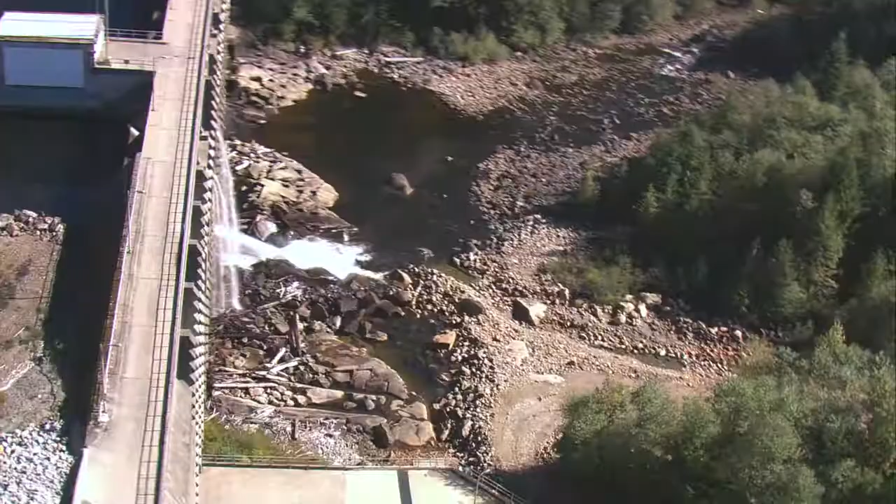Both the Seymour and Capilano reservoirs regulate the water level behind the dam using spillways. Currently, this water is simply returned to the river system, but it also represents untapped potential. As part of the region's joint water use plan, Metro is now considering using that water to generate electricity.

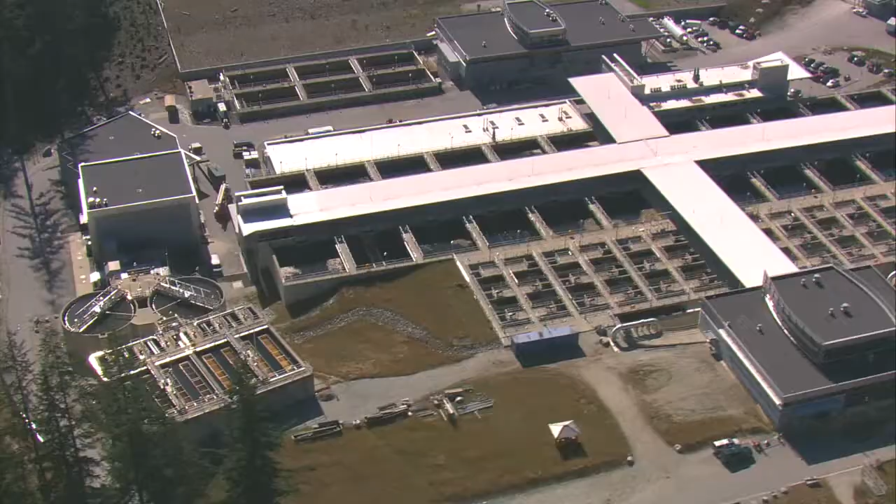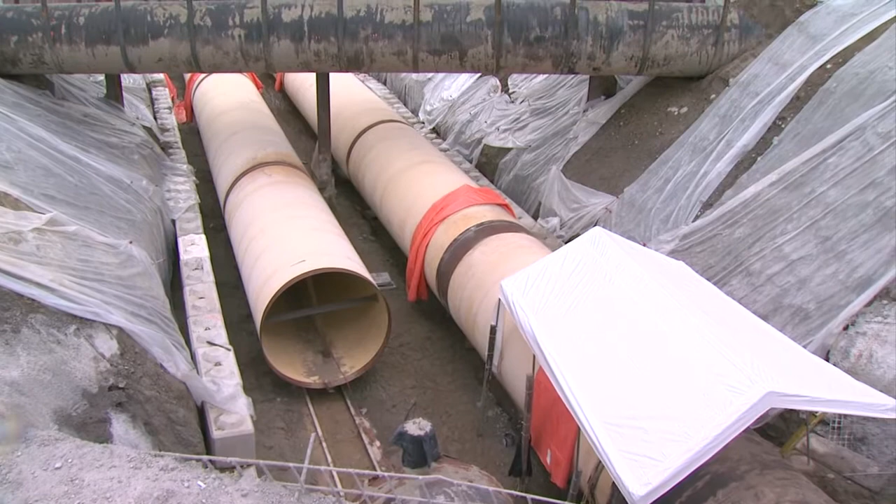The proposal is feasible because the new Seymour Capilano water filtration plant connects the Seymour and Capilano watersheds. So the tunnels linking these two tap water systems now create some opportunities for us, some flexibility to actually consider what we can do with these two systems jointly.

If you'd like to raise your hand, the microphone runners will come to you. First of all, however, the public is having a chance to offer their feedback about the proposal.

What population growth can you sustain with the system that you have in plan? The current reservoir system will probably provide an adequate supply for another 30 or 40 years.

The first public consultation session for the plan drew a variety of Metro Vancouver residents, there to discuss a wide range of water use issues. The reason why I came tonight is because it's very important that water remain in the public domain.

Of concern to many participants is the proposal's impact on fish in the river. We have a vested interest in what is going to be happening over the next 2 years with the water use planning issue, and we want to ensure that fisheries issues and habitat issues are going to be addressed during the process.

Like any water use plan, it's always a trade-off analysis. Water for fish, water for people, water at different times of the year. So it's that trade-off analysis where groups have to get together and find out what is the optimal solution.

You heard some concerns about not wanting to damage the quality of our water supply. That's number one on our list. We want to hear those concerns. We share those concerns, but we want to hear them coming from the public so that we know how to address them and how to allay those concerns.

If you would like to find out more, please visit the Metro Vancouver website. There you can find background information and additional public feedback resources regarding the joint water use planning process.

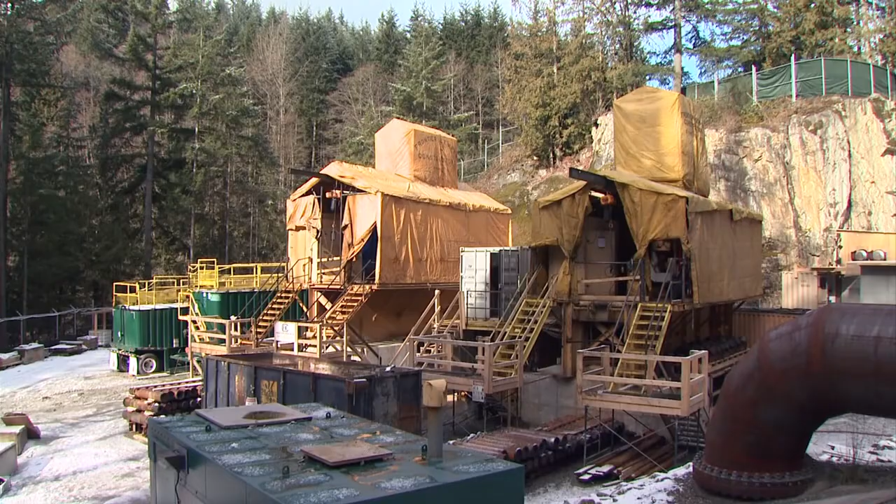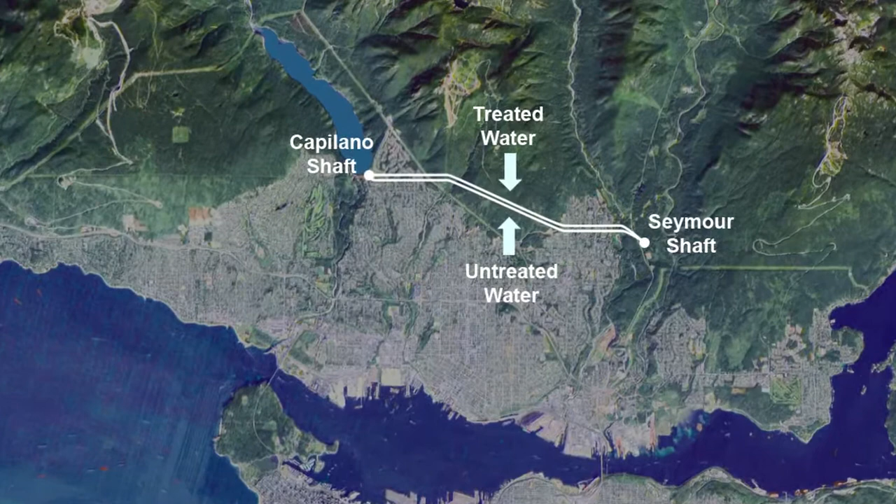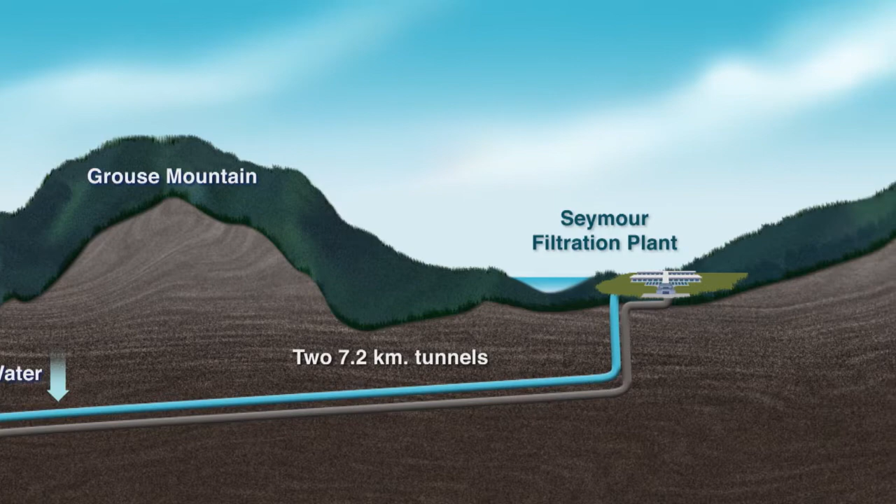The new kid on the block is literally on the block - the western end of it, that is. Twin 7.2-kilometer-long tunnels have been cut through the North Shore Mountains, from the Seymour watershed to the Capilano Reservoir. Upright shafts connect the tunnels to the surface. One of the underground tunnels will convey raw or untreated water from the Capilano source to the water filtration plant in the Seymour area. A second parallel tunnel will convey treated water back to the Capilano area, where it will be delivered to communities in the western part of the region.

Engineer Goran Ajaka has been with the project for close to a decade. What we have behind us, we have 2 raise bore machines doing the shafts for the Capilano end. We have 2 shafts - one is for untreated water and one is for treated water.

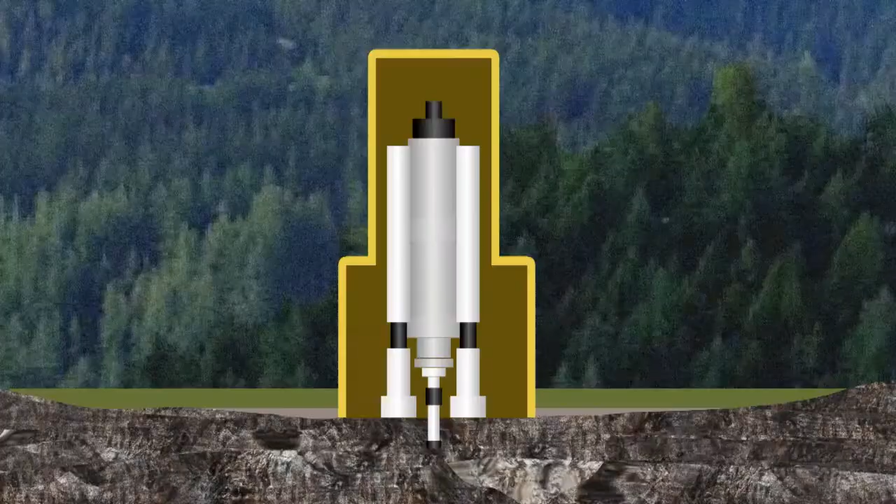A raise bore system is used. A powerful drill creates a narrow pilot hole that meets the tunnel below. A 4-meter cutter head is attached to the drill. The raise bore then begins pulling upward, with the cut rock falling down to the tunnel.

We're at the Capilano site, where we've been raise drilling these shafts to connect to the tunnels. Started raise drilling actually the week after Christmas.

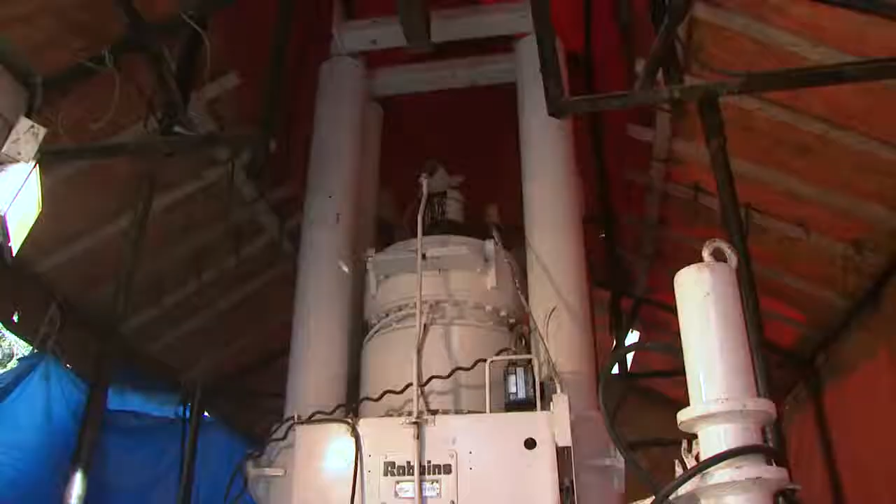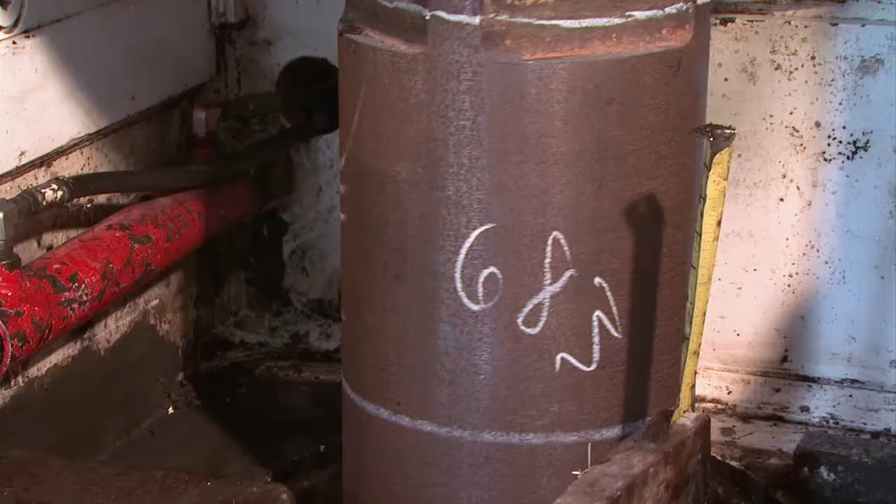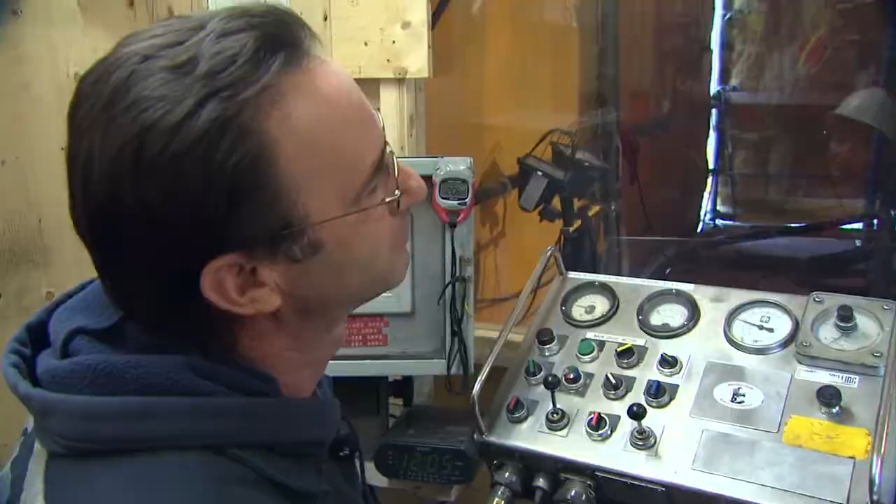Amid rumbles and screeches in the cabin housing the boring machine, the operators oversee the boring 24/7. That's a 200 horsepower motor, and it's going through a good sized gear reduction, of course. And it takes a heap to make that thing turn, and you can't see it. You know, I can't see nothing. And all you gotta do is go off your gauges.

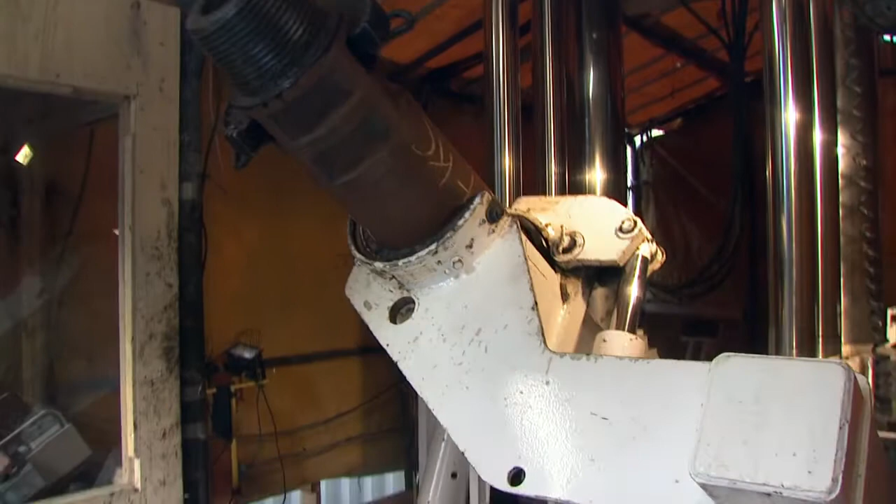As the machine is raising the shaft up 2 to 3 times a day, the machine needs to stop, pause, and remove the section of the shaft to carry on the excavation. I'm a driller's helper, and I pull the steel off as the raise bore, the reamer, is pulled up. The steel's behind me - there's 180 of them in there, and we just pull them off. I love it, it's great. It's working outdoors, which I like, and we get to do it at our own pace - well, actually the pace of the rock and the drill.

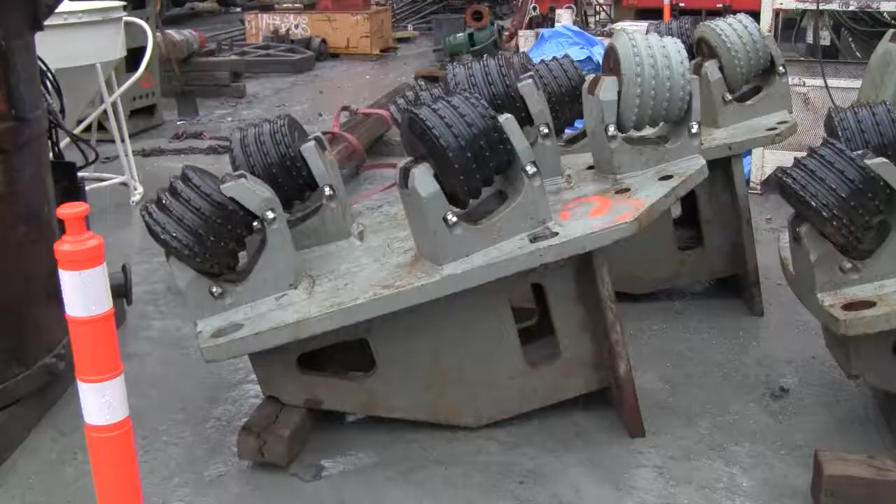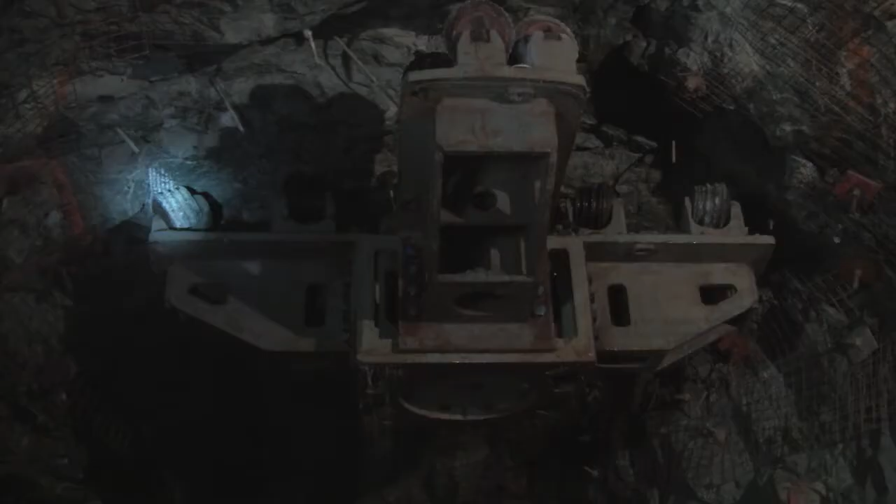The last time crews set eyes on the cutter head was almost 3 months earlier and 270 meters below ground. There are a number of cutters on the cutter head that are crunching the rock, chipping the rock. But I'm going to guess we were probably drilling a foot and a half an hour in that neighborhood, but it was granite all the way.

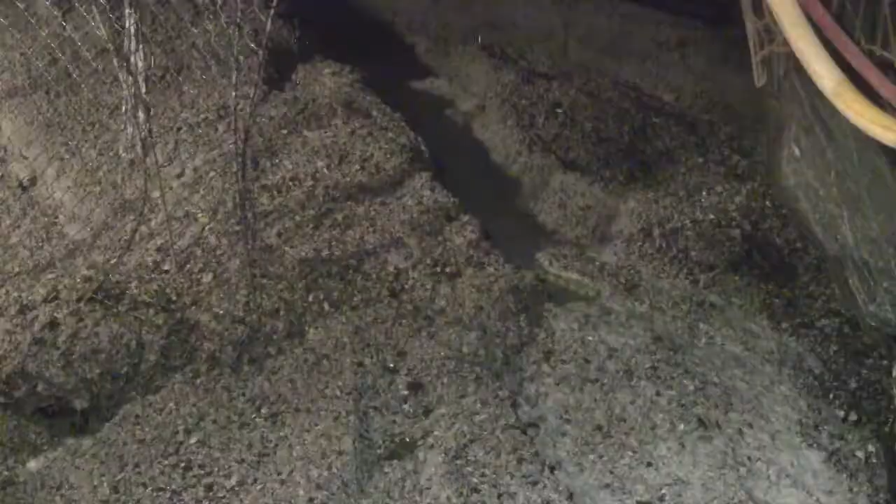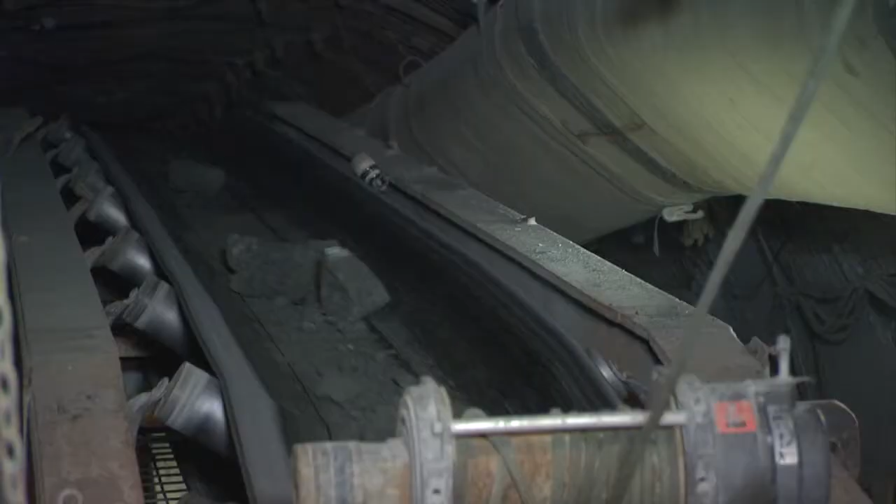Down below, the stones fall into a gallery at the tunnel end. They call it muck. There is equipment down there that scoops the excavated muck and loads it up into cars that are pulled by locomotives to the Seymour side. The material is being deposited in the Lower Seymour Conservation Reserve.

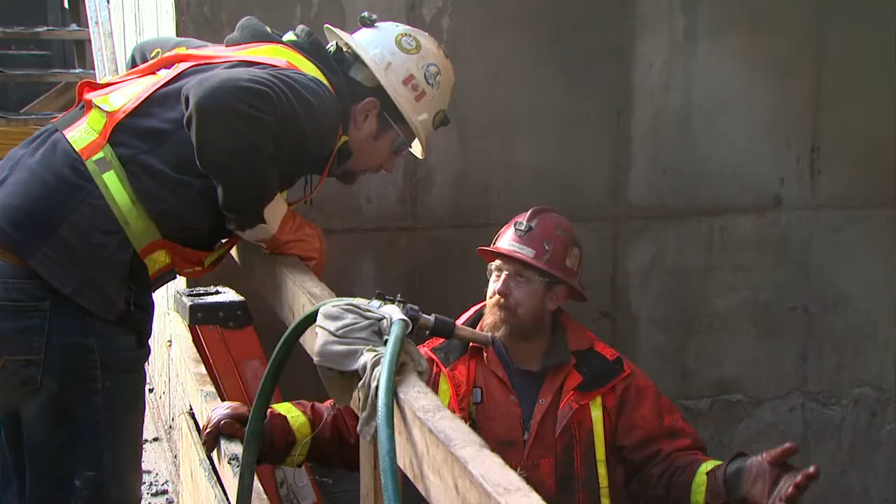It is late winter 2011, and crews are anticipating the first surface breakthrough of one of the shafts. Below this yellow-tarped raise bore engine is where the milestone will occur. For us, it's quite exciting because it represents completion of a portion of the work that's important to us.

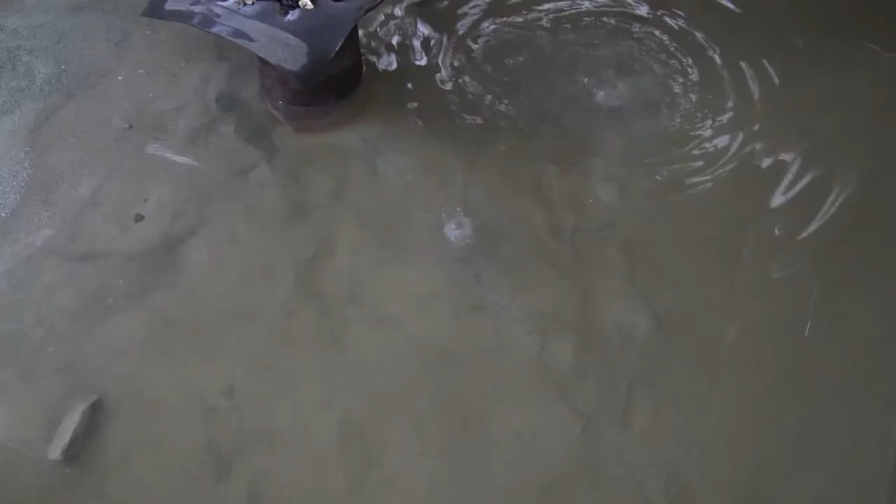What will be happening is as the concrete begins to break, the water will slowly go away. It takes about 2 hours as water seeps through the cracks. The reamer has mere inches to go.

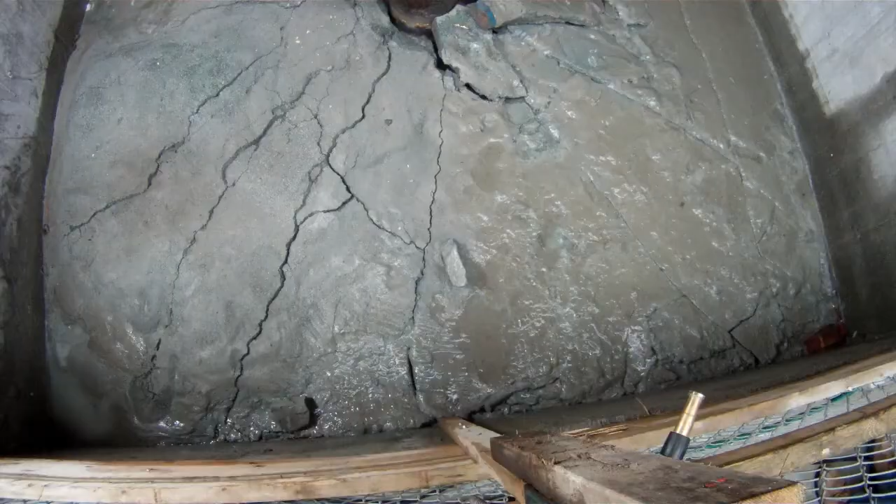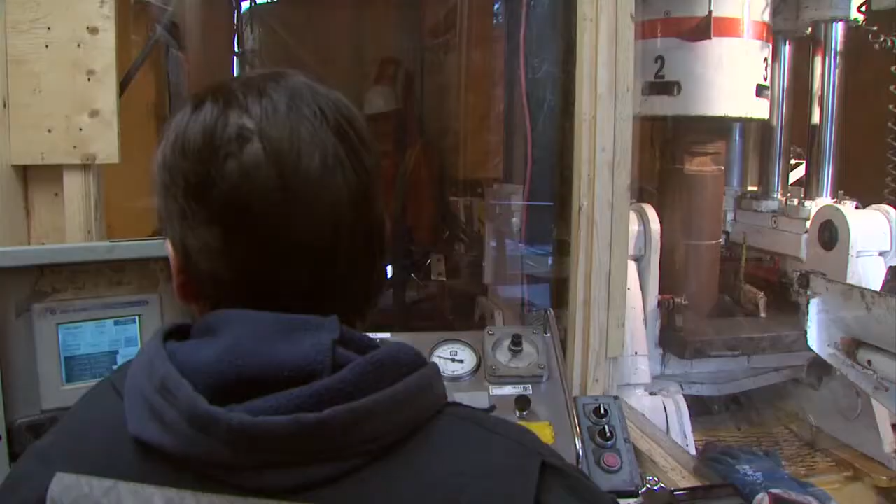The work crew and camera crew watch on as cracks appear on the shaft's surface. You'll see a lot of movement in the concrete, and then when it finally does go away, hopefully successfully, you'll hear a lot of noise in the bottom of the shaft. These pieces are falling 850 feet. Then, in about a minute, the reamer head comes roaring through.

A few photos, smiles, then work resumes. The second shaft still has to have its breakthrough milestone moment.

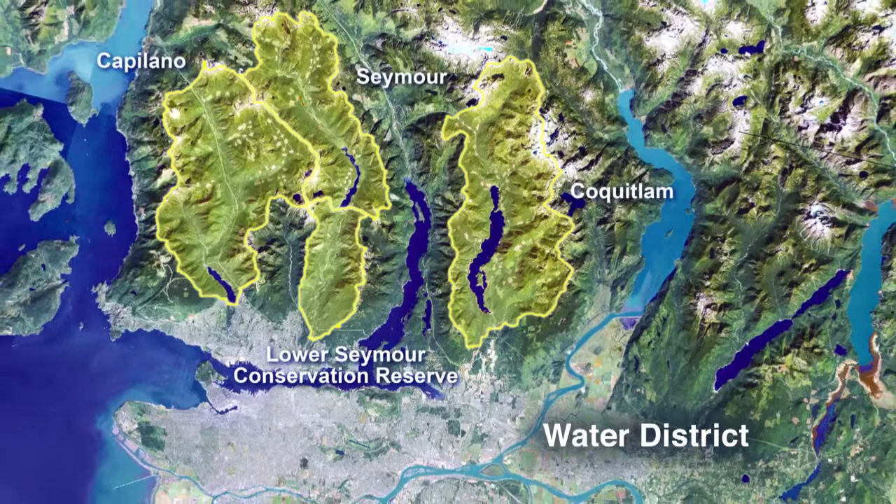Metro Vancouver is blessed with some of the best tap water in the world. It comes from three reservoirs: Capilano, Seymour, and Coquitlam. The regional water main system brings the water to homes and businesses in Metro's member municipalities.

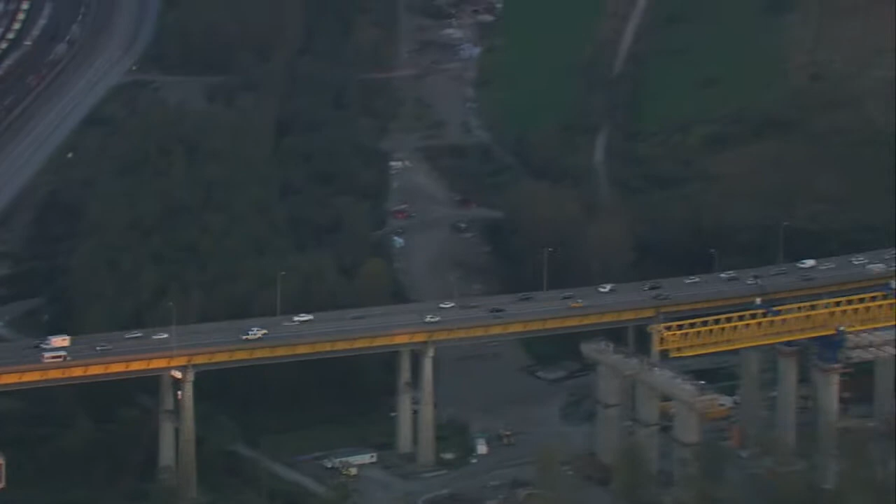Right now, Metro Vancouver is planning a new water main under the Fraser River, just downstream of the Port Mann, the bridge that links Coquitlam and Surrey. This new water main will be much larger than the existing Port Mann water main to accommodate growth in the municipalities south of the Fraser River. The new water main will also be able to resist a major earthquake.

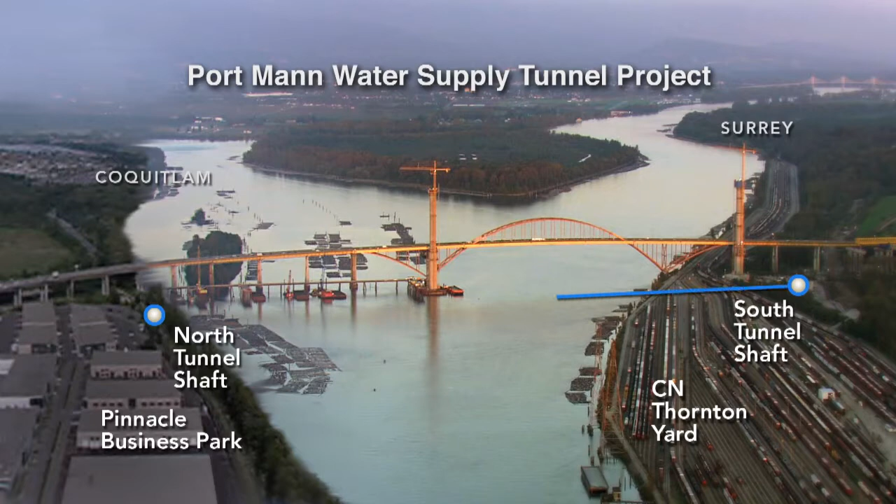First, two shafts are built about 60 meters deep, one in Surrey near 116A Avenue and Surrey Road, and the other in Coquitlam's Pinnacle Business Park. The new main will be constructed in a one-kilometer-long tunnel underneath the riverbed.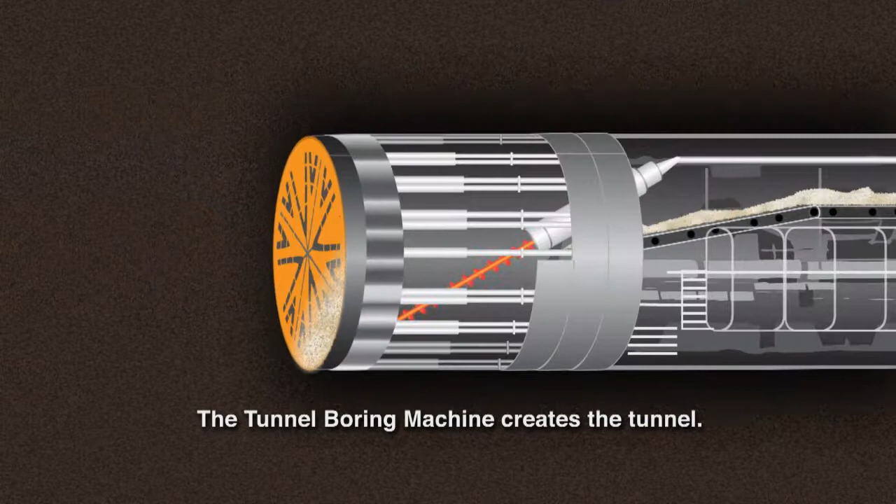Using the shafts for access, a tunnel boring machine, or TBM, will create the tunnel. It's like a large mechanical mole with cutters in front to dig away the soil. During tunnel excavation, precast concrete rings will be installed to provide support. Then, welded steel water main pipes can be installed in the excavated tunnel.

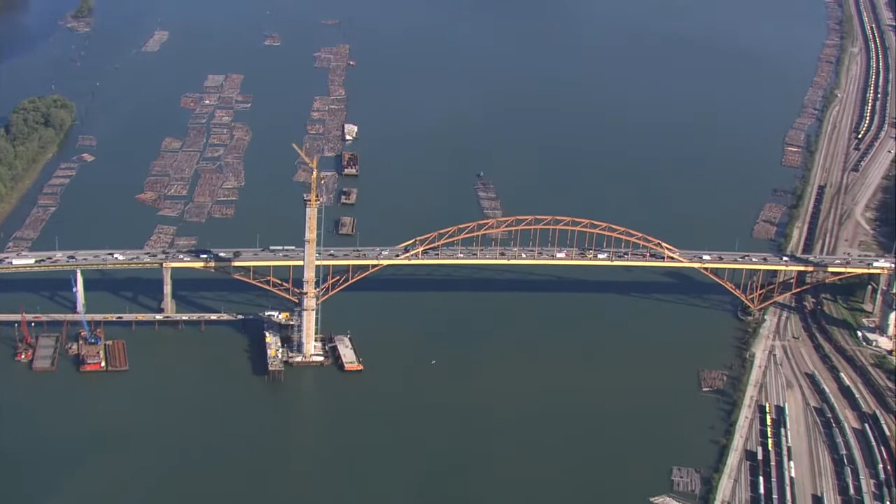Once completed, the new Port Mann water supply main will eventually be connected to new mains on either side of the river. For more information, visit www.metrovancouver.org and search Port Mann Water Supply Tunnel.

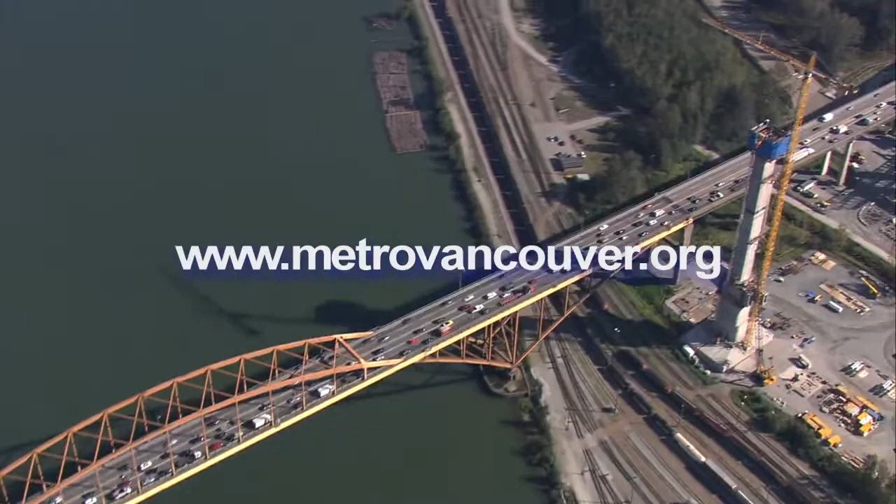Welcome back. There's a lot of impressive machinery and technology in a state-of-the-art facility like this. But it's important to remember that no matter how high-tech the job, in the end, the results are still all about the people.

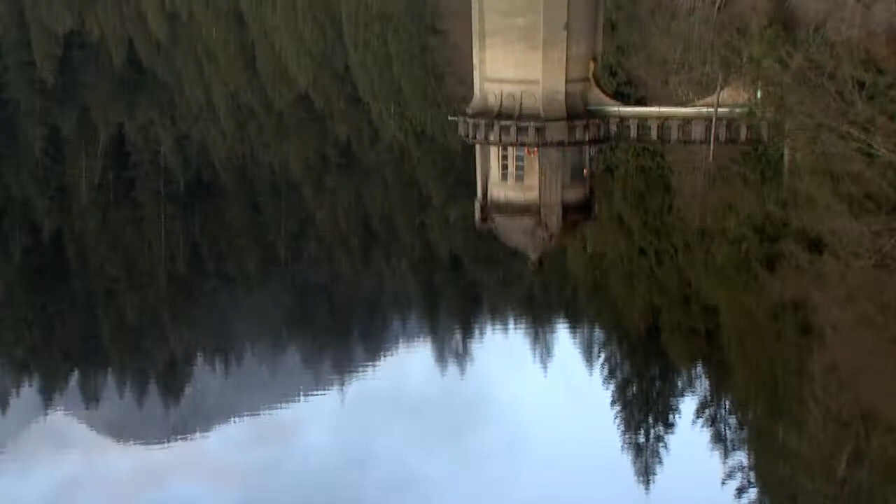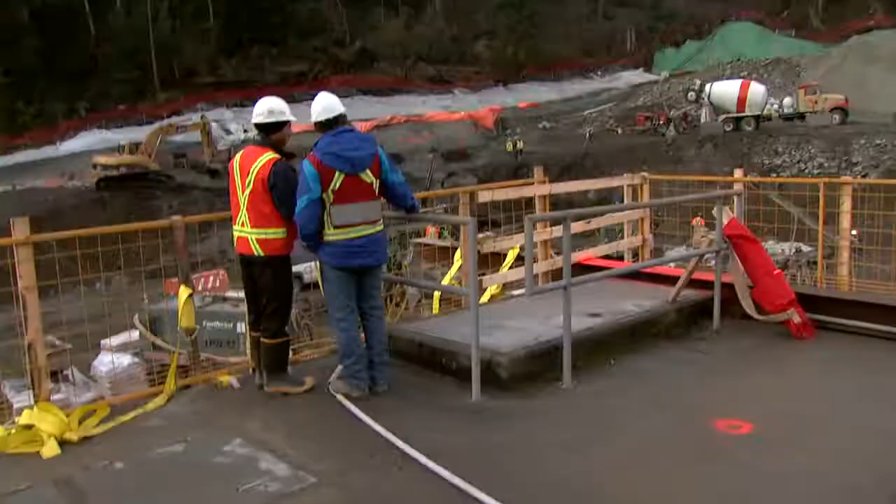The waters of the Coquitlam Reservoir are calm and serene. But not far downstream, a major excavation is underway. These machines and workers are helping build a new disinfection plant for Metro Vancouver's drinking water.

What we are doing is upgrading our existing facilities, which includes the installation of a brand new UV disinfection plant, which will help make sure that the water is safe for the public both now and into the future.

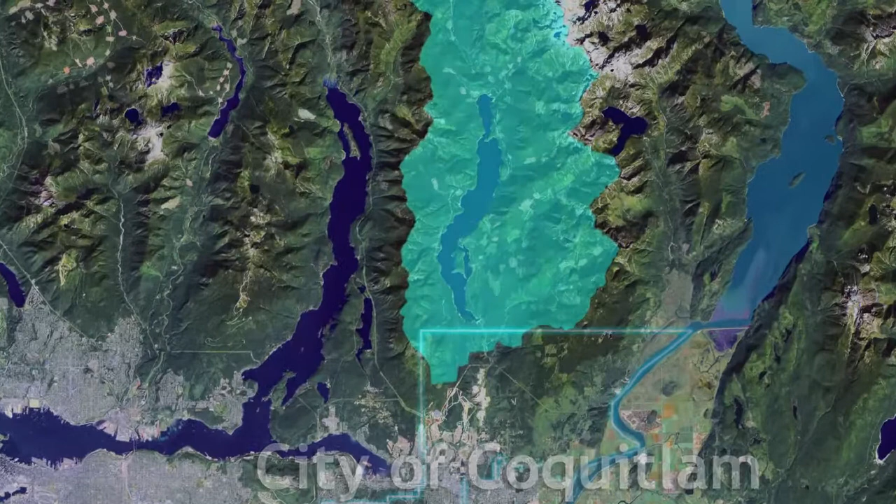Located on Coquitlam's north side, the 190 square kilometer watershed provides a third of the region's drinking water. It is this area below the dam where construction is underway. Behind me you can see the intake structure, a 1950s heritage site. The tower marks the site where water enters underground pipes.

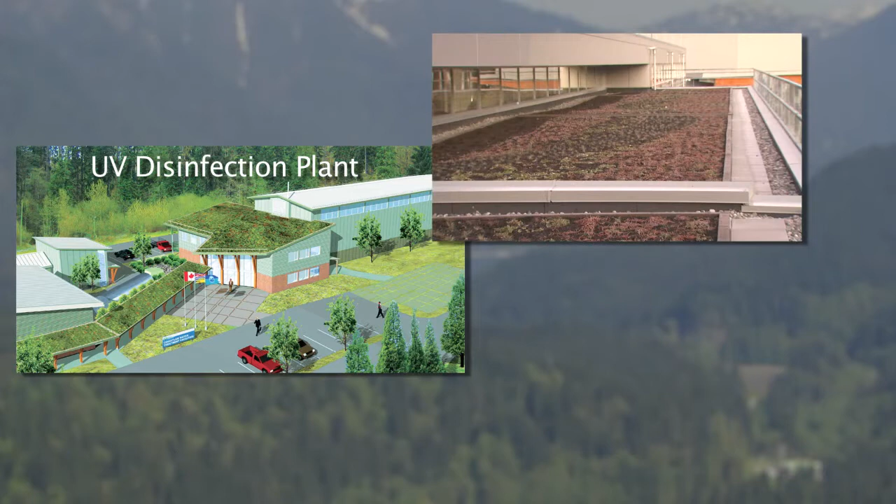Currently, the water travels south through an ozone facility and a chlorination plant before passing the watershed boundary a few kilometers later. The new facility will go here and will include environmental features such as a green roof, LEED design, and reclaimed heat and water conservation systems.

The existing ozone plant itself also has upgrade work associated with it. Dielectric generators will be installed to improve the ozone creation process and thus improve clarity of water entering the UV facility.

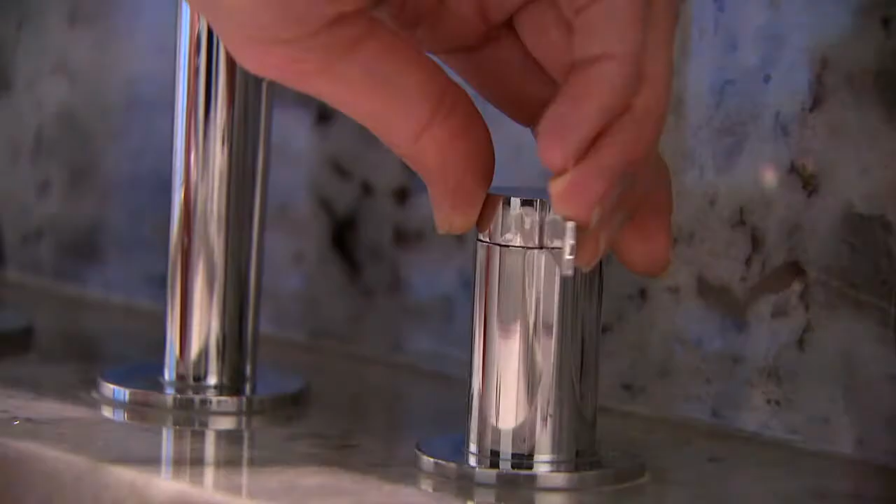By improving the clarity of the water using ozone, which is already existing, we're able to actually downsize the size of the actual facility itself, saving significant cost both for construction and also in the long term in terms of operations.

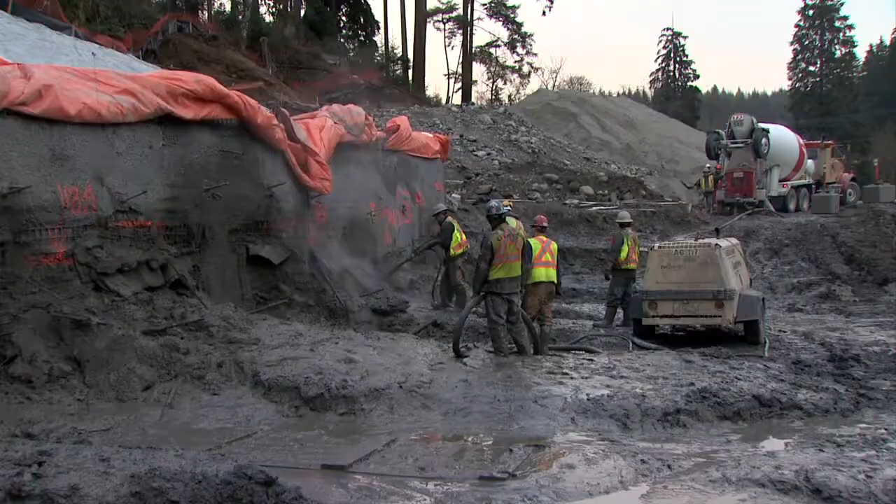A lot of the initial phase is not very glamorous. We're into a lot of earthworks, we're into a lot of planning. Excavation and concrete pouring of the chamber walls will be the focus through spring 2012. From that point forward, you'll see the actual building rising out of the ground itself.

And there'll be a lot of mechanical and electrical work going on through the year 2012. At a total cost of $110 million, the project is slated to be ready in late 2013.

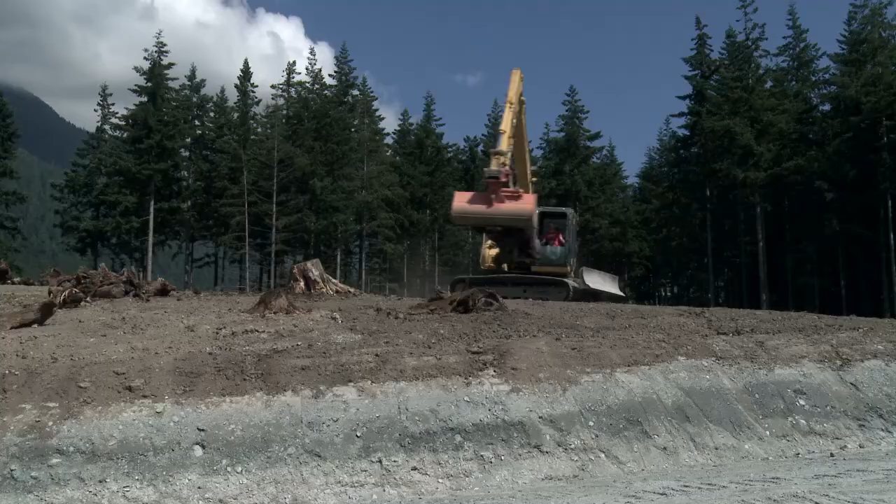Final touches will include environmental restoration work at the fill sites and around the new facility, improving the quality of Metro Vancouver's drinking water. At the end of the day, it will be an exciting project that we can all be proud of.

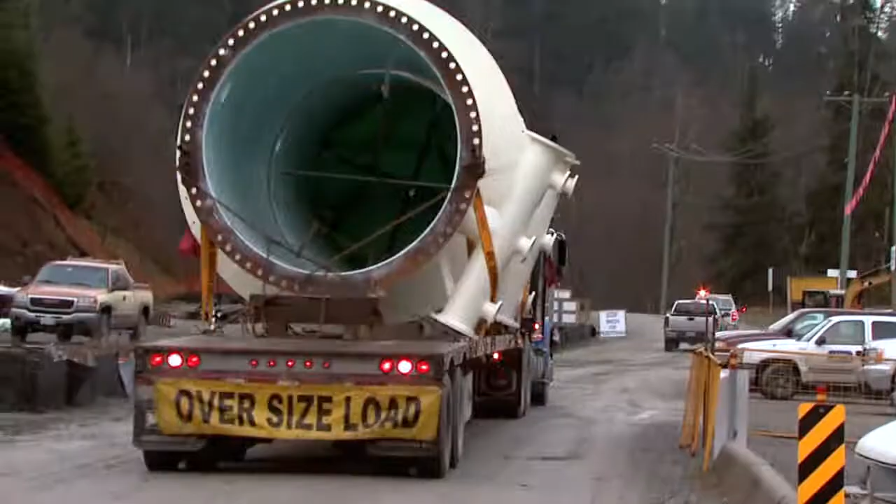Welcome back. You're listening to the sound of 24 enormous UV reactors providing sparkling clean water. Guaranteeing the delivery of high-quality, safe drinking water is a priority for Metro Vancouver, and it's why it's also undertaking a major upgrade of its third reservoir located in the Coquitlam watershed.

Sustainable infrastructure means that the buildings need to be as efficient as possible, but it also means that the building process itself needs to protect or enhance the environment. Next up, we see how the UV plant is being built in a way that protects Mother Nature.

Careful steps - that's the guiding principle behind the new water treatment facility being built at the Coquitlam Reservoir. The motto applies to both the methods used during construction and the reasons for the new plant.

The purpose of the project is to build a new UV disinfection plant, to comply with recent changes to the guidelines for Canadian drinking water quality. In this particular case, it's Cryptosporidium, a parasite that's endemic to most watersheds within British Columbia, and includes our lake source here as well.

The watershed's ozone treatment system is getting an upgrade, and a new building is being built to house new technology. Ultraviolet lights are used to target pathogens. It's a very nifty type of technology - it does not add any chemical to the water, but still allows us complete disinfection.

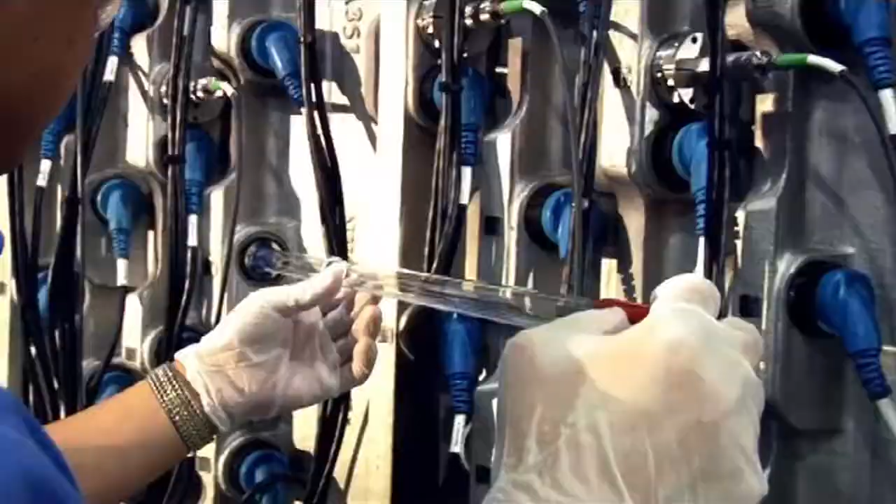The treatment process allows water to flow past ultraviolet light tubes, which sterilize microscopic organisms and leave them unable to replicate. 254 nanometers is the actual wavelength that UV lamps generate, and that disrupts the genetic makeup of these organisms.

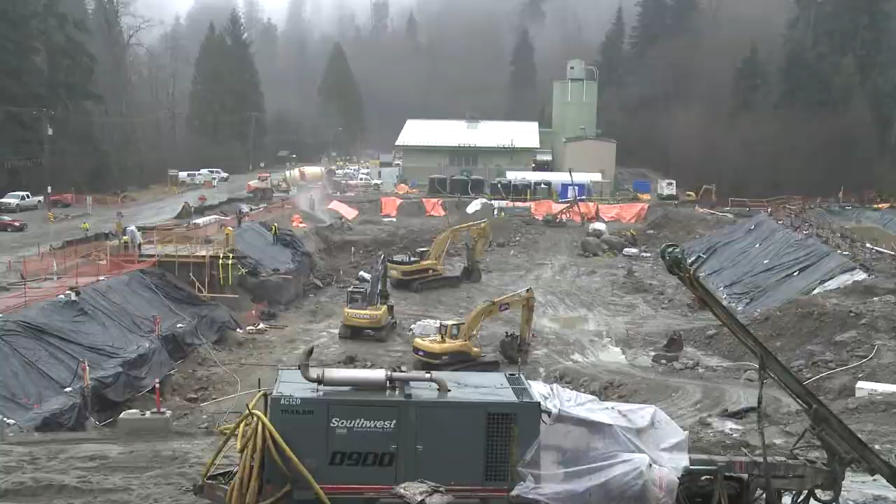The sediment pond that you're looking at here is where all the site water is being pumped to. Then it runs through a storm tech system where it's pre-treated, and goes through what we call flocculation. That grabs the silt from the water and drops it out of suspension. We measure it - it's called NTU, a measure of light through water. Here we're regulated to 5 NTU, which is very low, but achievable.

As is common on excavations, narrow wells are drilled to pump groundwater away from the work site. We have two wells that are high in iron content, so they're being discharged through aeration, which dissipates the iron before discharge. We're below the threshold for fish.

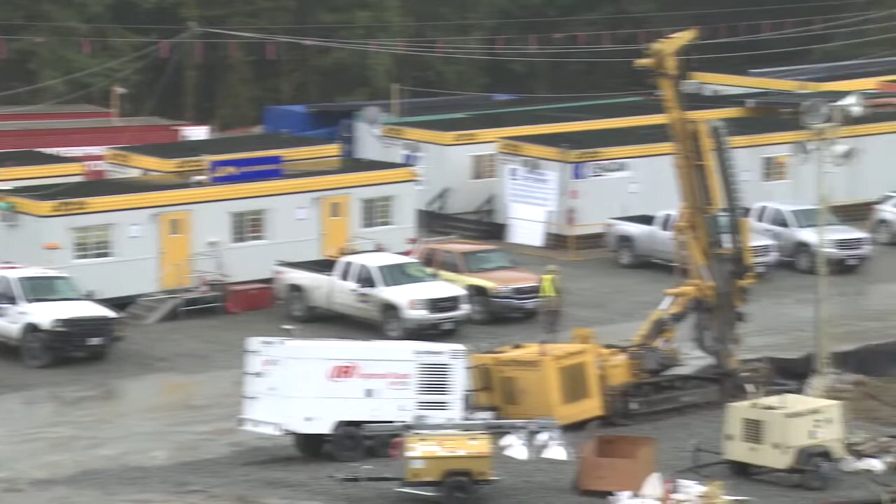The Coquitlam River is one of several features that constrain the site. It flows along the eastern edge, passing behind site trailers. Paralleling that along the roadway is the existing drinking water supply pipe. Then on the west, a hillside juts up sharply.

That's why we ended up with such a compact design. The result was a vertical configuration for the UV piping, which consequently resulted in a much deeper foundation at the bottom end.

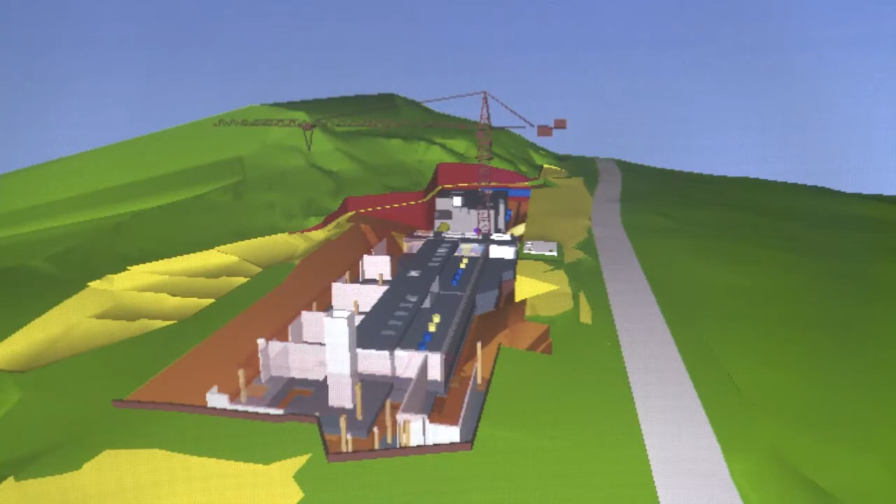One of the significant impacts that we have reduced with regards to how the project has been managed is taking a number of trucks off the roadways. That material being removed - up to 80,000 cubic meters - is being taken from the site into the watershed areas for disposal. That's about 5,000 to 6,000 truck trips taken off public roadways.

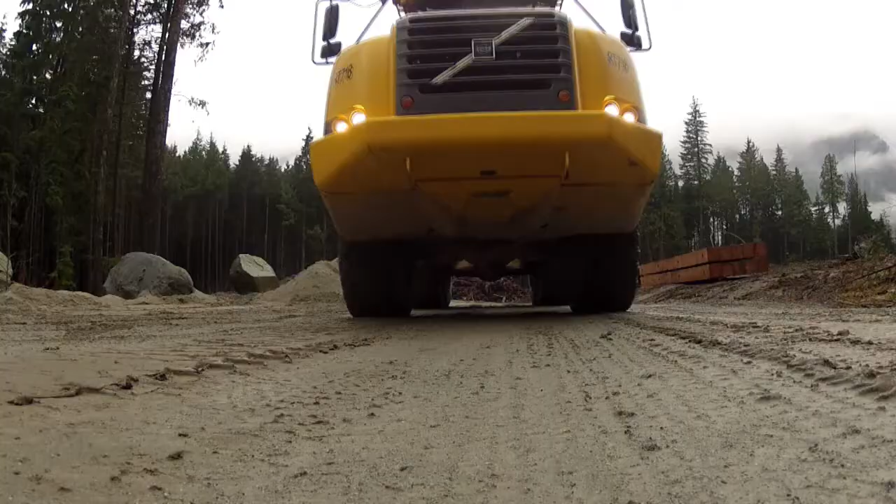One concern with this process was the spread of invasive plant seeds known to be on the site before work began - Japanese knotweed was one, and policeman's helmet is another. What we've done is take those plants themselves, bag them, and have them taken off-site for disposal in an appropriate landfill facility.

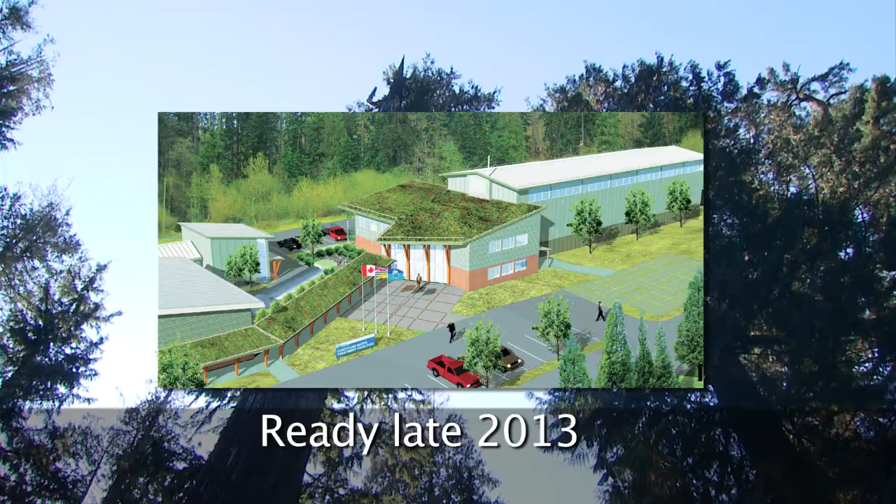Environmental monitoring will continue as the project progresses towards completion in late 2013. We pay a lot more attention to the environment than we ever did before. It's the new normal.

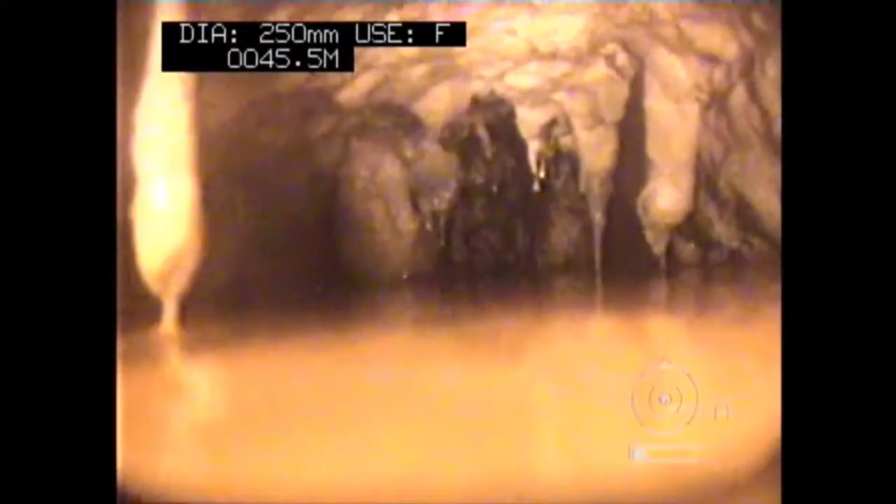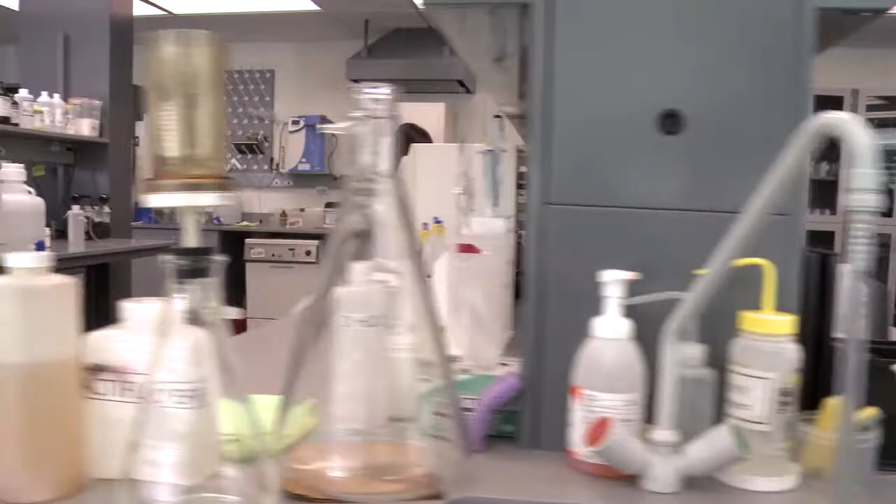Welcome back to our look at drinking water, some of the best in the world. Distributing water sustainably is tied to our region's growth, in that as we build more compact communities, we're able to deliver water more efficiently. This plays out in the eastern part of our region, where Metro is building infrastructure to meet future demand.

The Coquitlam Reservoir provides 34% of the region's water—safe, high-quality drinking water that is second to none.

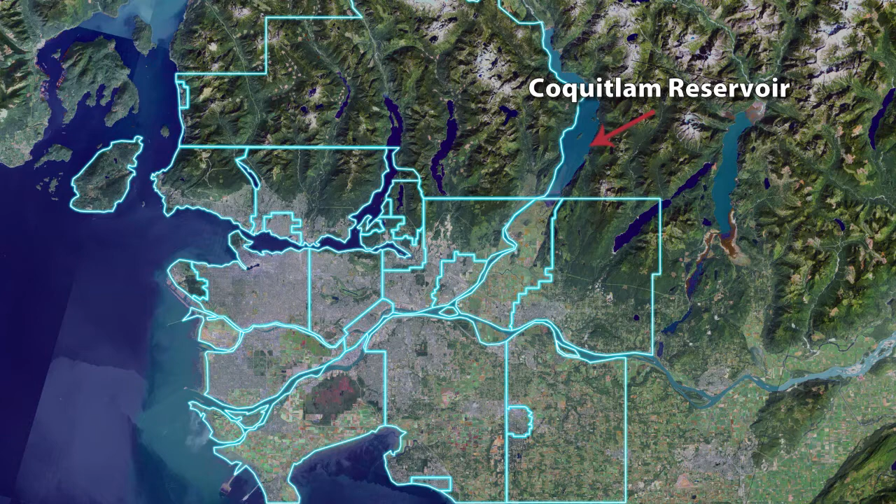It serves an area where the population is booming, particularly in the eastern part of the region: Maple Ridge, Langley, and parts of Surrey. That growth is expected to continue over the next two decades, and that means the delivery system to get water to all those new residents needs a major overhaul.

We're on the site of the pump station that is part of the Ridge Water Utility Projects, which includes the associated pipelines in this area.

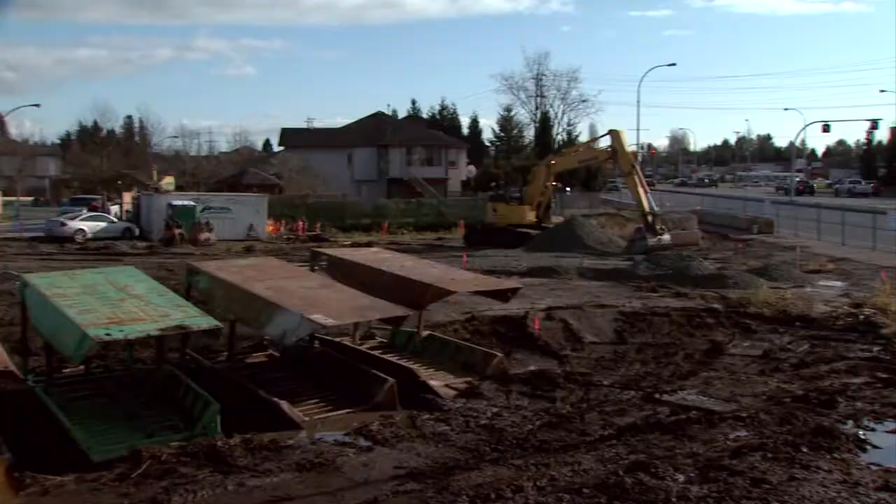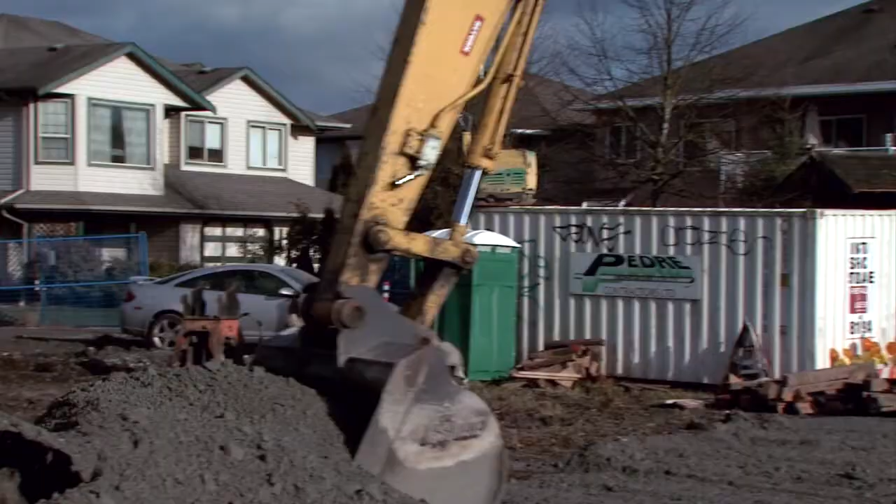This pump station will also be replacing an aging pump station that's nearby, so it will have a higher capacity and it will be up to date as far as the efficiency and the sustainability of the project and the building itself.

About 50 homes are being directly affected by the construction, but the entire neighborhood of as many as 500 homes will experience some inconvenience while the new pump station and all the pipe leading to and from the building is installed.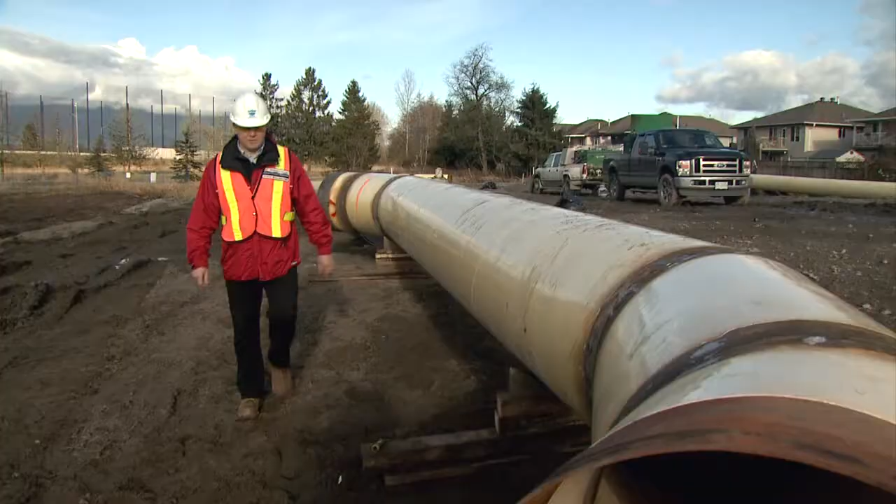For that reason, Metro Vancouver has appointed a community liaison officer.

The idea is to inform residents of what we're doing, as well as get feedback on their individual concerns. So we want to hear from residents so that we can work with them, and we work with our contractor.

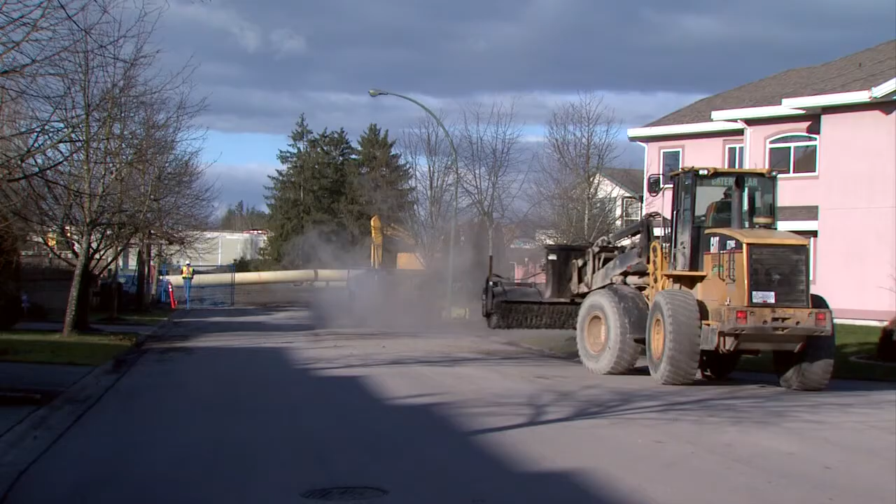To minimize the amount of impact, such as dust, cleaning of the roads, and the amount of noise they make.

Relaying those concerns to the project's architect is also a key consideration. It doesn't mean that every project can address every need—that's not a realistic expectation.

And it's also true that we're working in a denser context, so we have to get smarter now about how these facilities integrate more with existing neighborhoods and with new neighborhoods. So this will be an ongoing challenge.

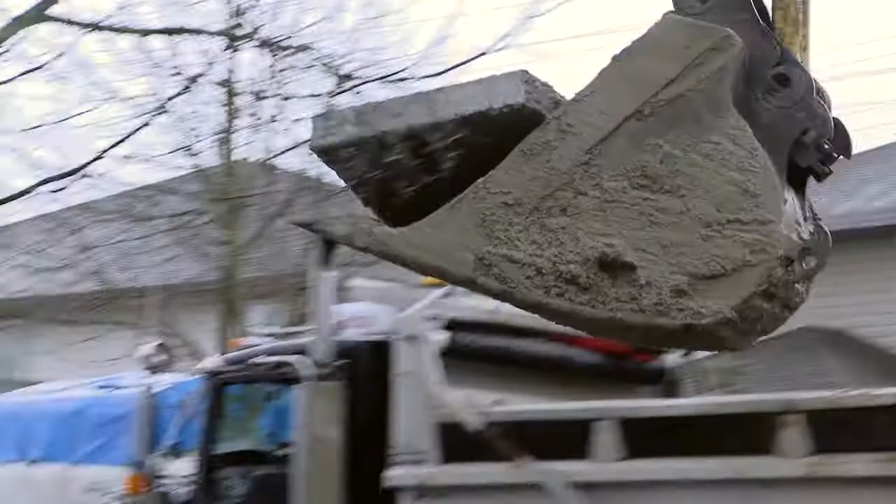For the people in this neighborhood, the open trench pipe installation that started in late January of 2012 was likely the most negative aspect of the utility project. On the upside, the process is very fast—most of the pipe was installed and covered over in just one month.

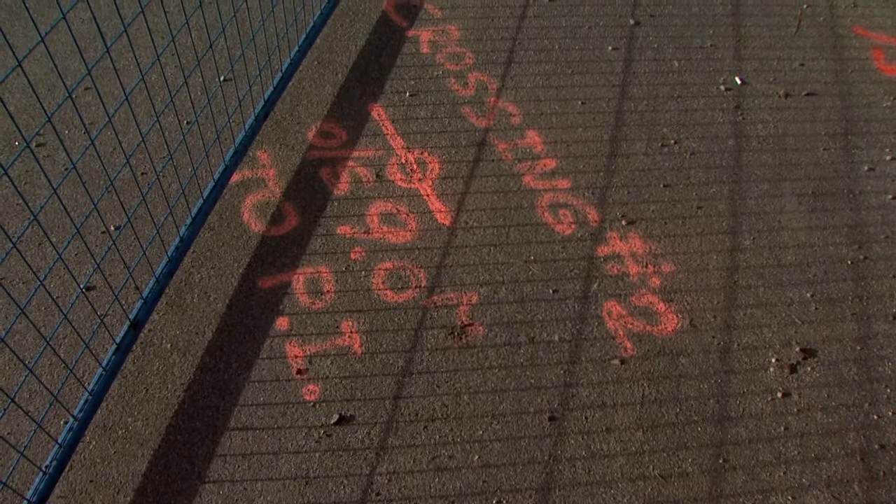Tunnels under the Lougheed Highway will also be built using entry and exit shafts that were installed using something called sheet piling. Rather than dig a shaft and then shore it up, these sheets of metal are driven into the ground to form the outer walls. Here again, this construction method has been chosen because it's faster.

As for the pump station itself, it will be built to the highest environmental standards and will feature a green roof, energy-efficient equipment, and even the ability to generate energy.

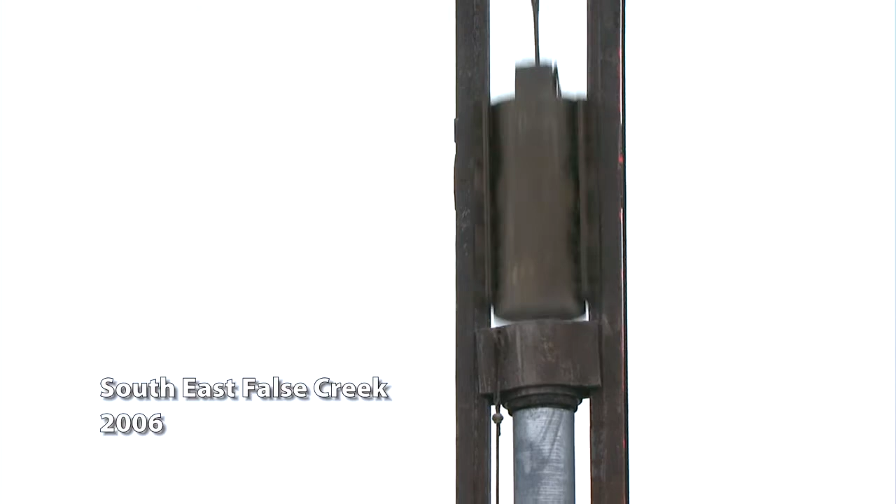During its construction, it will need to be built on piles for stability, but instead of using conventional pile driving—there's this constant metallic sound that reverberates through an area, a ringing, hammering type of noise, and really it drives people crazy.

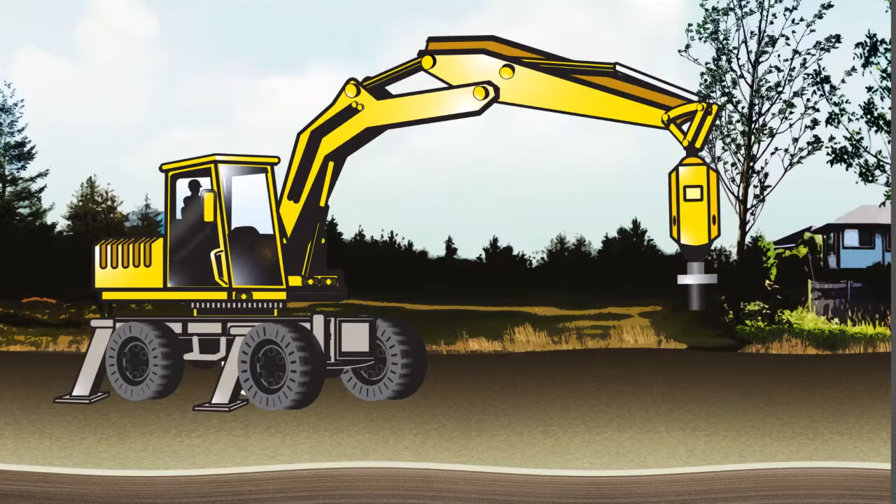The piles will be put into the ground later this year using a methodology called helical piles. It looks like a big corkscrew, and around the outside of it there's a big blade that's fashioned so that when the pile is turned, it digs itself into the ground, and this can be done with a really limited amount of noise.

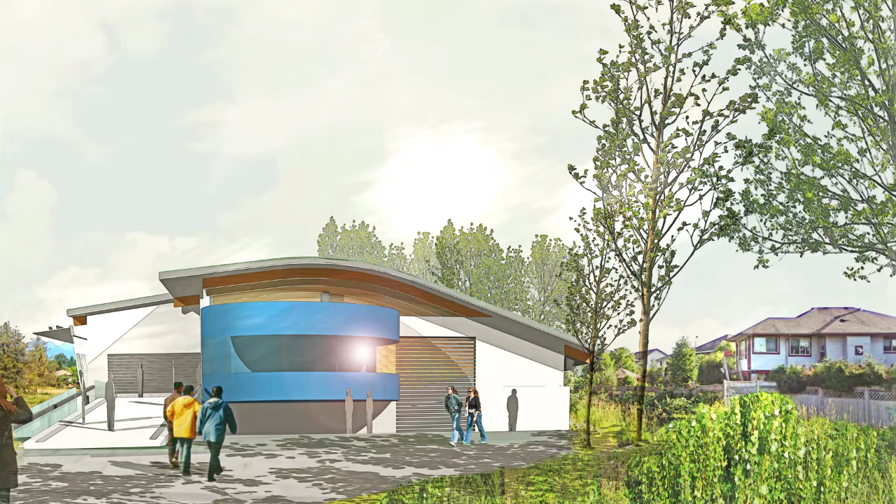The look of the building is also important. It's hoped the pump station will be seen as an improvement over what the site once looked like—an unkempt vacant lot. These are public facilities that are important to all of us.

We all use water, and the way we choose to design them to make them fit properly into dense areas, be an aesthetic benefit, and also respond specifically to the urban design needs of a neighborhood is a really important challenge.

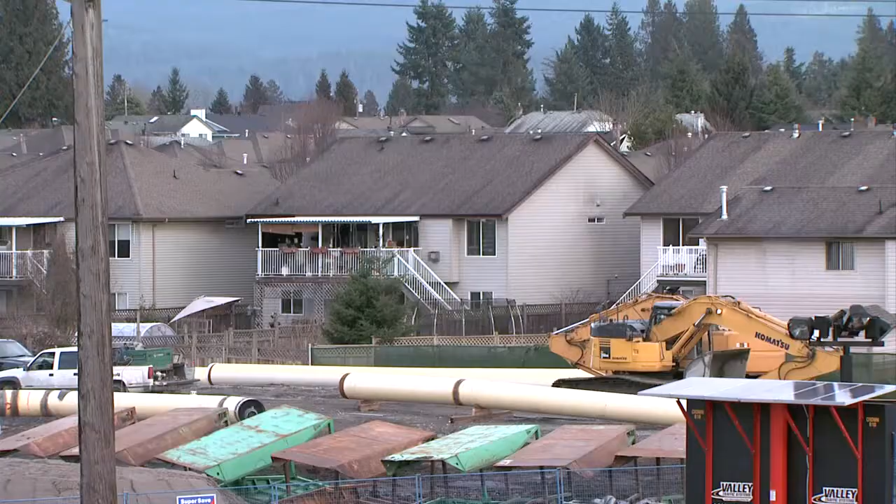The pump station is designed to block traffic noise from the Lougheed Highway and also to deflect any potential operating noise away from neighboring homes.

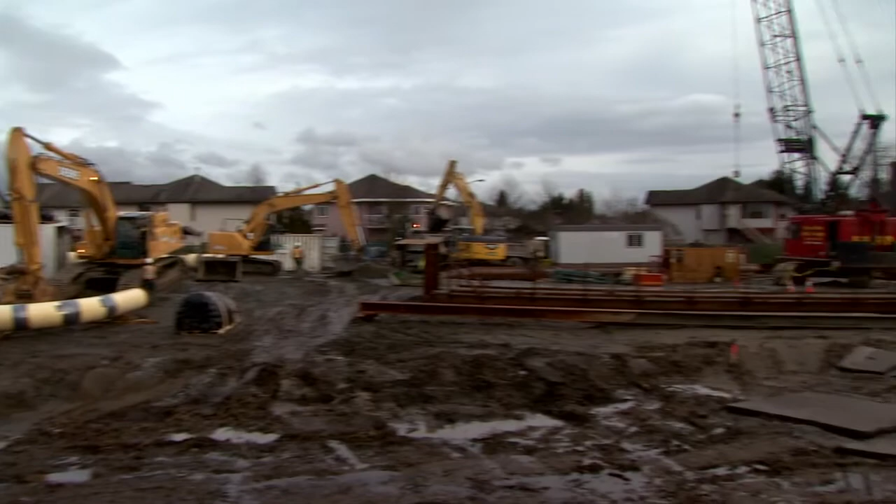Part of Metro Vancouver's commitment to making the construction and operation of this entire project as painless as possible.

We need to get the project built, but we also want to work with the residents to maintain their quality of life that they have come to expect in a fairly quiet neighborhood as much as possible.